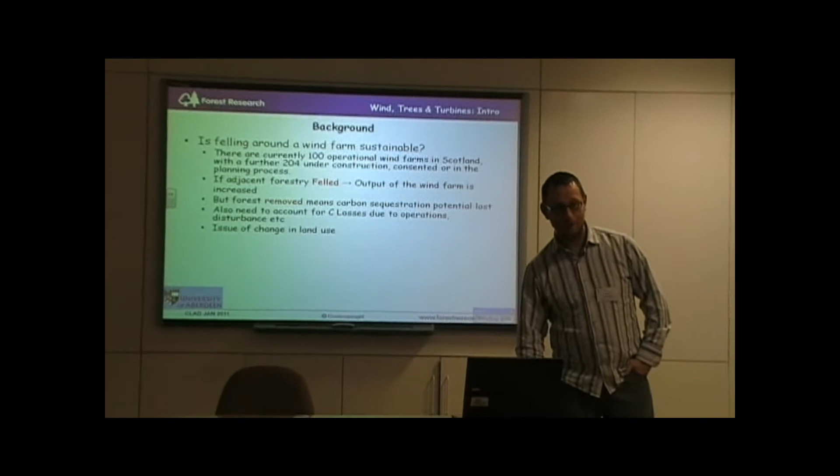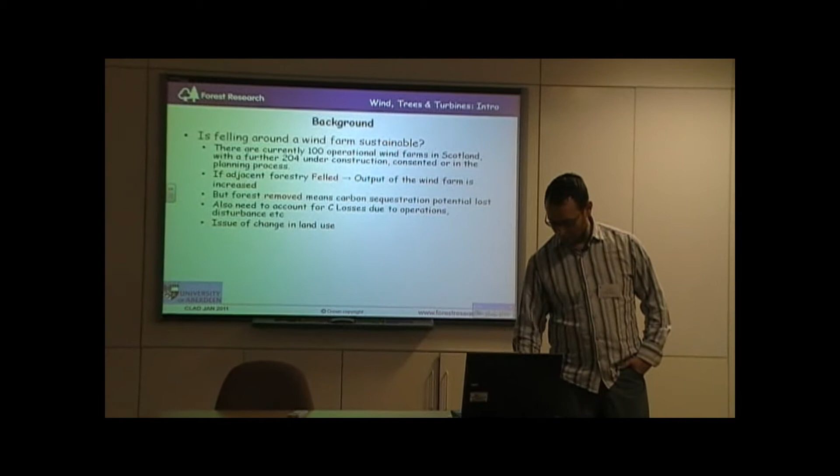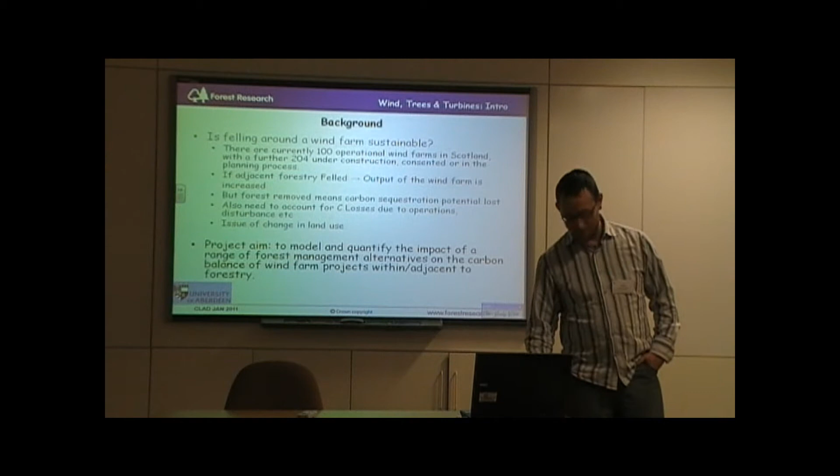I'm going to talk to you about the forest management bits. Barry will talk to you about the forest-tree-wind interaction bits. If we have time at the end, I'll say a little bit about the statutory planning and forest strategy impacts as well. So the project's aim is to model and quantify the impact of a range of forest management alternatives on the carbon balance of wind farm projects which were within and or adjacent to existing forestry.

Within the Climate Change Scotland Act, there are very strong incentives for the development of renewable energy technologies, one of which is wind. But there are also very strong assumptions regarding the net benefits to society of carbon capture by forests. Forests are very efficient solar panels, if you want. They convert solar energy into timber, and they're very good at it. So we have to take that as a fundamental understanding that the forest is actually providing a very useful service to society.

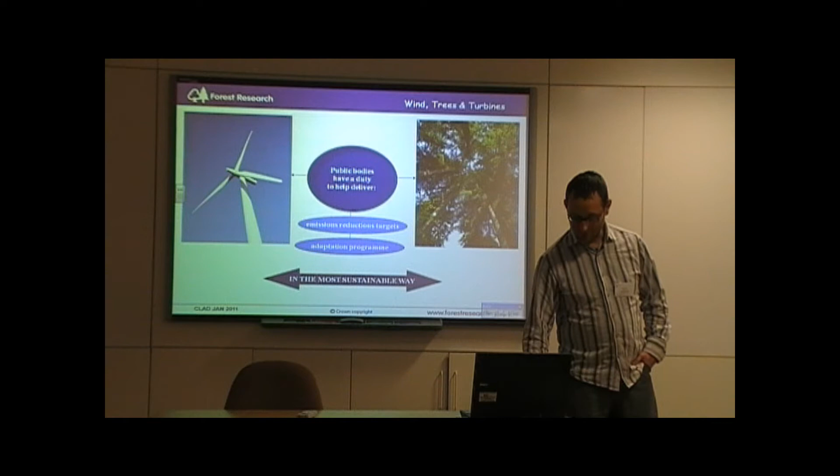And public bodies such as Forestry Commission, Scottish Government, have a duty to help deliver emissions reductions targets, maintain the land use capability, ability to adapt to future climate change, and do that in the most sustainable manner. That's why there's regulation, planning, etc.

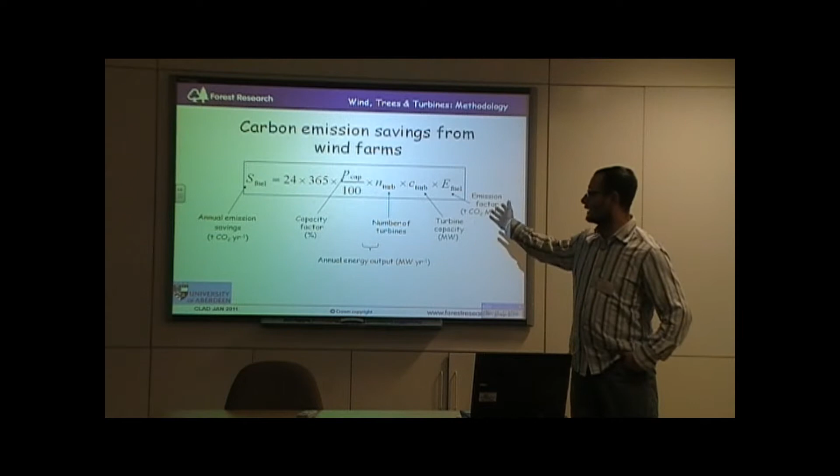Now, the original calculator that Joe put together, I'm sure most of you in the audience have seen this, looked at the annual emissions savings offset against carbon-intensive fuel sources for a site with a given capacity factor. It looked at all of the various processes that you have to account for in that LCA style analysis.

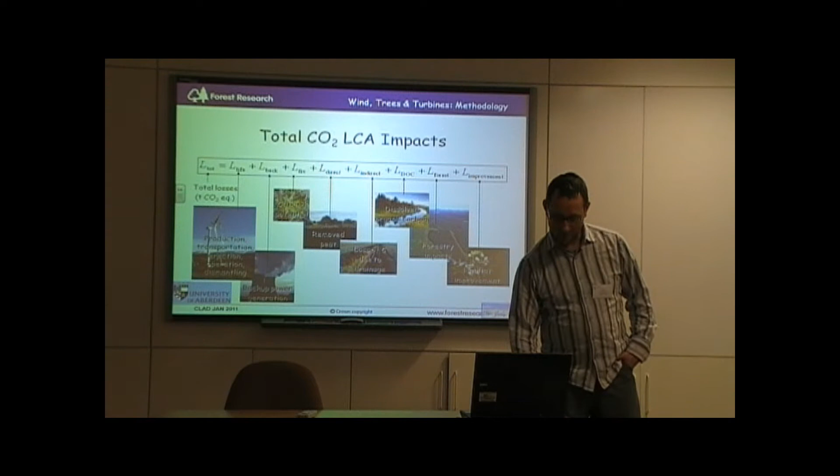In looking at the forestry impacts in the existing version, the version you can download off the Scottish Government website, forest carbon loss is calculated at a fixed rate that's integrated across the rotation life of a forest. The standing forest carbon is unaccounted for. Where does it go when you fell it? There's a loss of it to the atmosphere, but what you do with the actual timber product is not within the boundaries of the calculator as delivered.

There is no impact of that forest being adjacent to the turbines. It only does deep peats, and forestry - there is quite a lot of forestry on deep peats in Highland Scotland, in very windy places - but there's also a lot of forestry on organomineral soils, which are becoming an increasing focus of the developers' portfolio. There was no operational impacts and operational variation. By that I mean the ability to manage the forest.

So, in the new version, forest carbon loss varies with age. It is explicit. So if you fell a 25-year forest, you lose the CO2 in the timber in that 25-year-old forest. You have the opportunity to capture some net benefit for the development by burning it as a non-fossil fuel, as a low carbon energy source - wood fuel. You can use it as wood fuel.

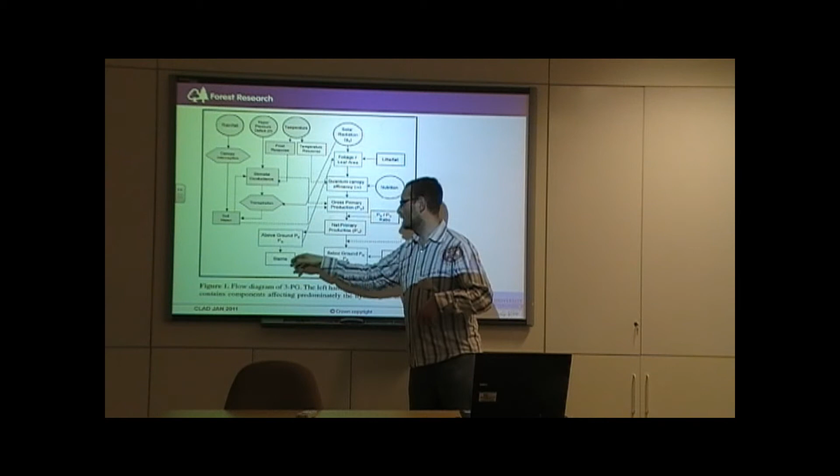So I'll touch on 3PG. 3PG is driven by climate, temperature, rainfall, etc. It then essentially assumes a tree is a huge leaf, and it partitions the carbon that's captured by that leaf into a growing tree, and some of that is put into stems, some of it into the ground, some of it turned over in roots, but it's a fairly simple process.

It's bread and butter for a physiologist.

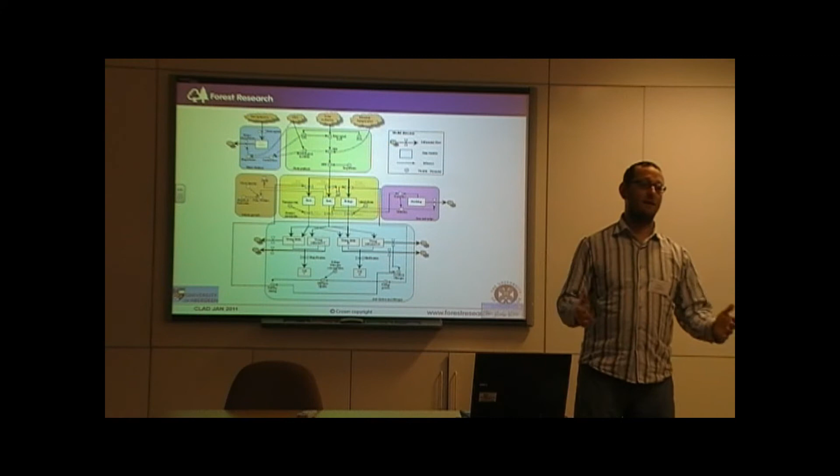This is the actual program that we use to run it, and you can see it's a little bit more involved, particularly in the soil component. My colleague Georgios Xenakis, who's at Edinburgh University, is responsible for this part of the project. What we're doing is using a complex physiological model which we then simplify down into the most essential elements to give you a reasonable estimate of the carbon exchange that the forest provides.

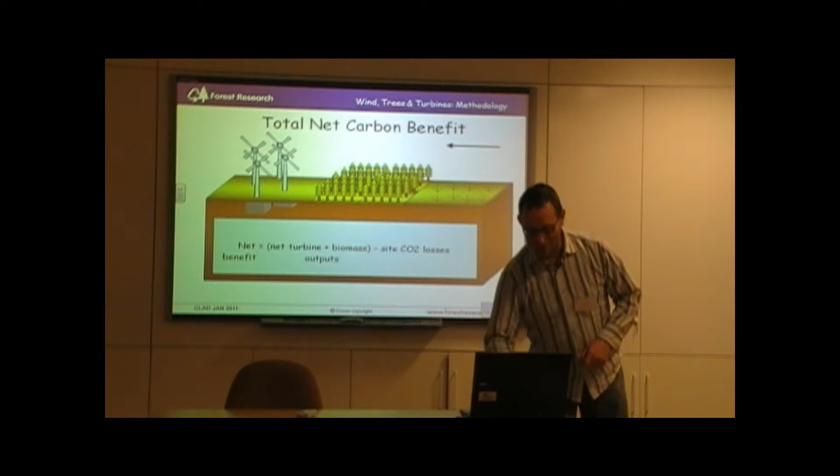Thanks to Joe for these diagrams. They're not all working. So what's the total net carbon benefit? Well, there's something gone a little bit strange here. It's a version control issue. I work for the civil service, we only have PowerPoint 2003.

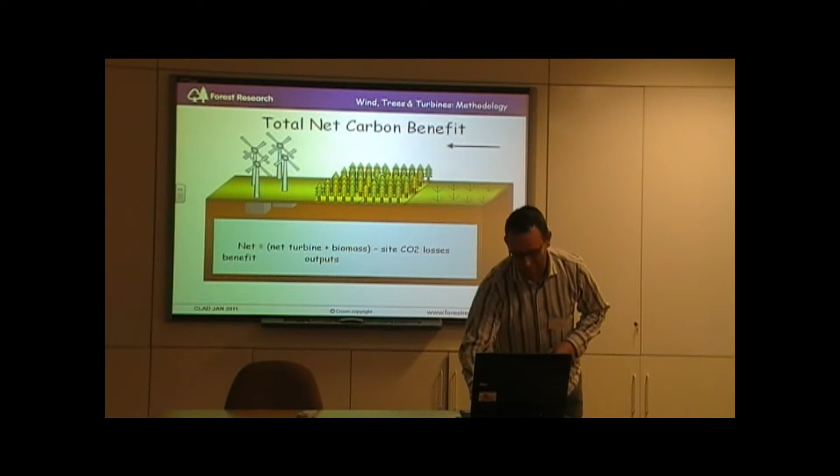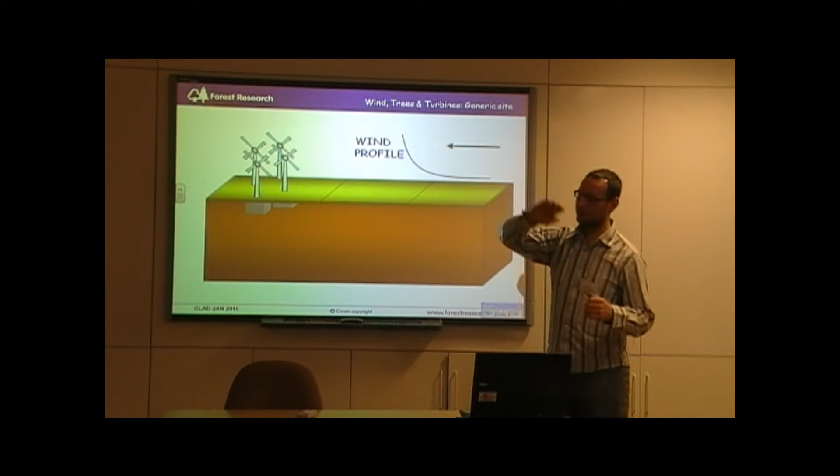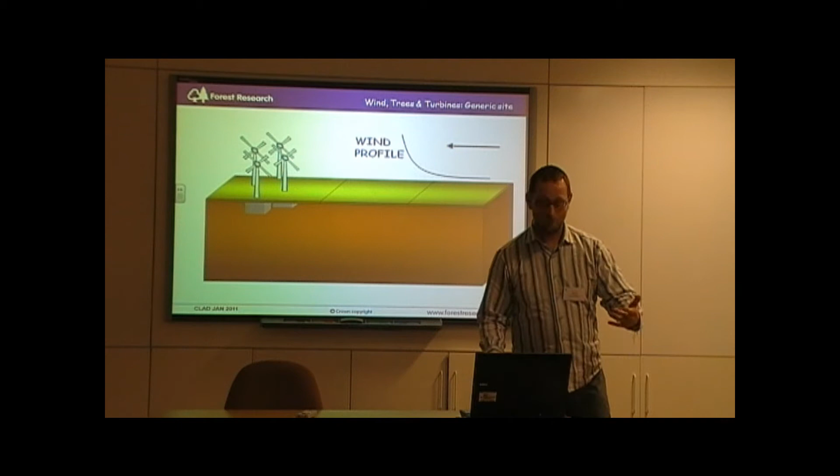Net benefit: net turbines, potential biomass, minus site CO2 losses. If we remove all the trees, we get a very predictable wind profile, and we maximise the potential net benefit from the turbines. When a forest is present, its physical presence alters the wind profile.

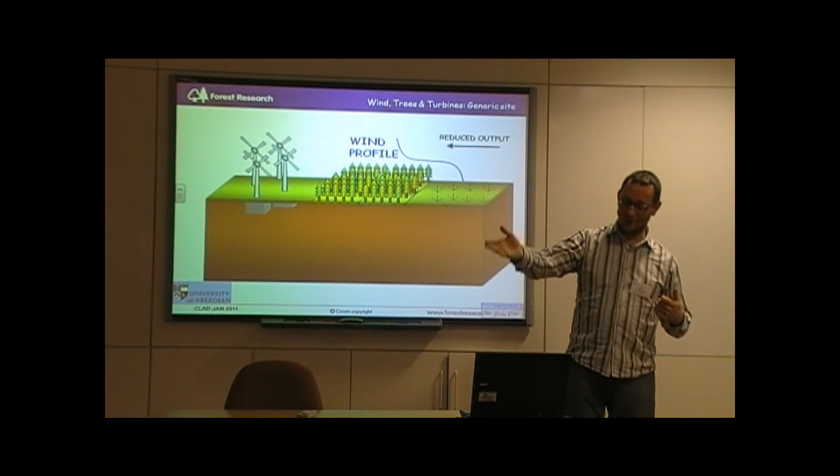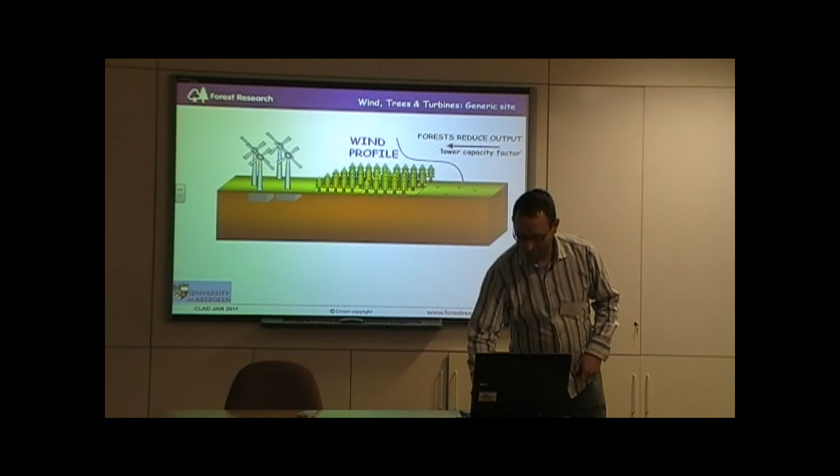This is the expertise of Barry, so I'm not really going to go there anymore. But the essential thing is it lowers the capacity factor. You're not going to get as much output from your turbines in the presence of forests. But we can manage those forests in a number of ways.

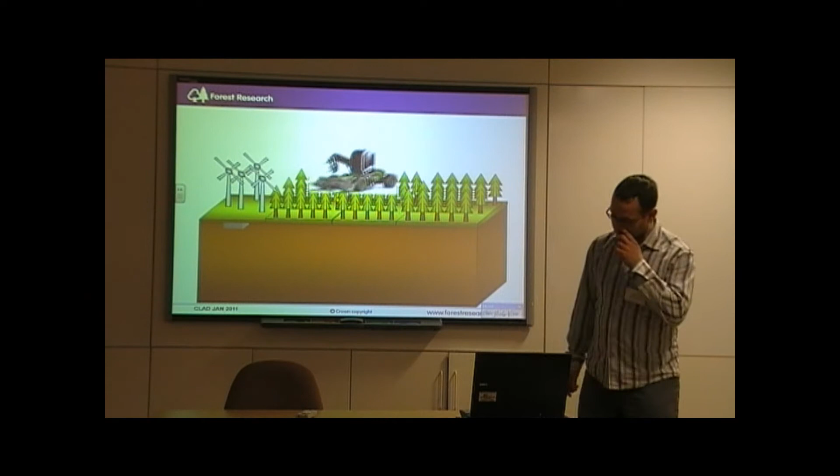We can take our harvester and create a keyhole. The tool allows you to set the keyhole dimensions as you see fit as part of your site management. It's not fixed at 75 metres, that's just an example.

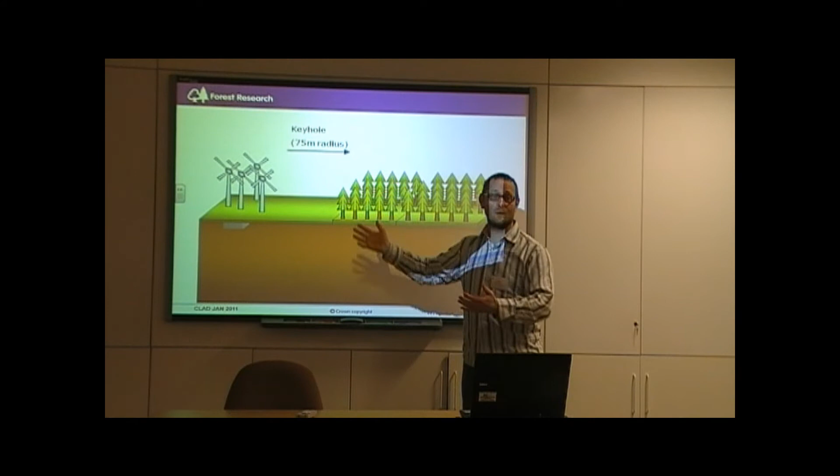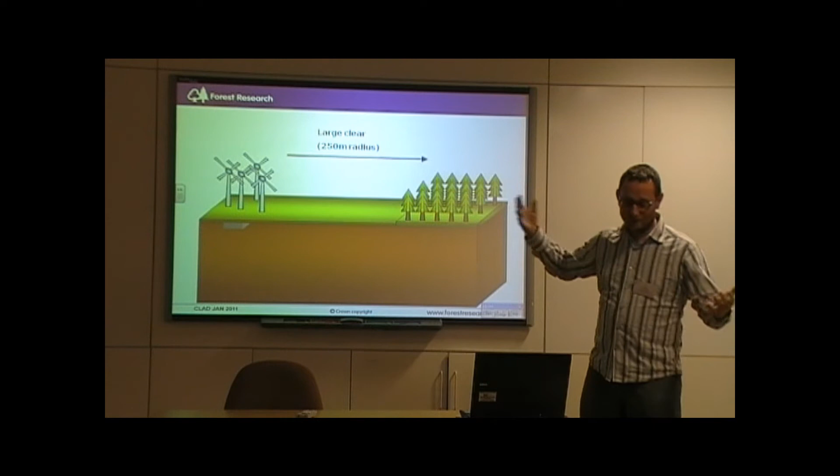You can take your harvester and fell a large clearing. In this instance, I'm suggesting 250 metres. You can say it's 800. I really don't mind.

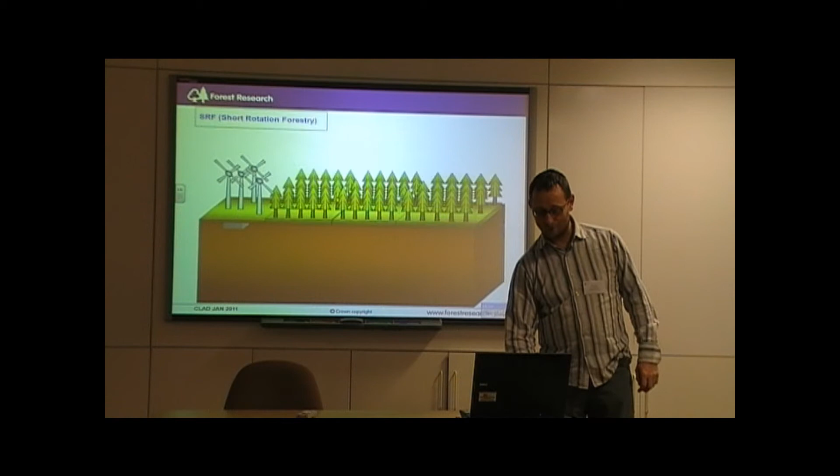Or you can fell the whole lot. In this instance, it's an 800 metre radius to the existing forest edge. But whilst you do that, you also have an option of then replanting a portion of the site with what I'm terming short rotation forestry.

There's a number of means of managing forests to low vegetation height. Coppice is one of them, and would be included under the generic forestry banner that I'm using today. Low height native woodland would be another one.

We are not going to deliver you a tool that gives you all the different forest management options. It's going to give you an option of replanting with one of two species, but then managing their height. That's what it's going to do. If you want to do low density native woodland, you'll have to think up a clever way of doing that yourself, or come and speak to me privately and I'll agree a price.

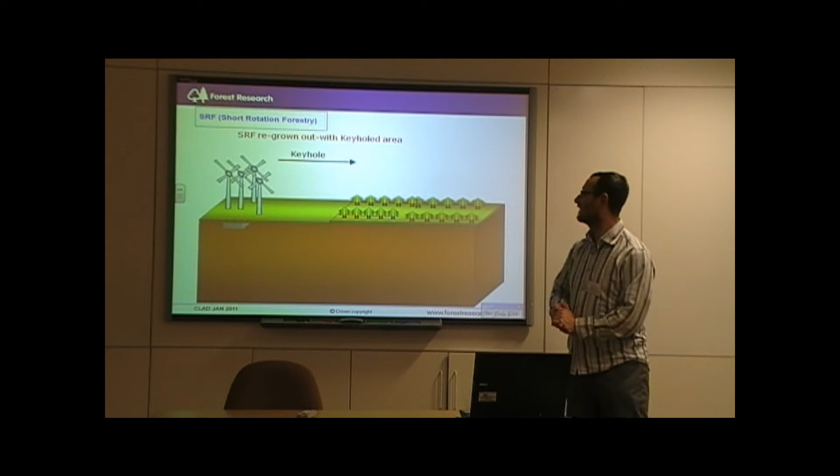But what we can do is look at what happens with short rotation forestry, and how that short rotation forestry can be planted outwith a keyhole or within the large clearing—all these options are there in the tool. So it allows you to look at the different forest management options and then your total carbon emissions and carbon payback time.

At which point I'll let Barry tell you about wind.

Okay, as Mike said, the presence of forests affects the wind profile. Is it that one too? No, that one that's on the table. Yeah, has this got a laser? No. Yeah, we couldn't get it to work earlier. It wasn't working earlier. Okay.

The presence of forest affects the wind profile, and as we know from some wind farms that have been developed in Scotland, if you're not careful, the return from your wind farm can be quite severely impacted by the presence of those trees.

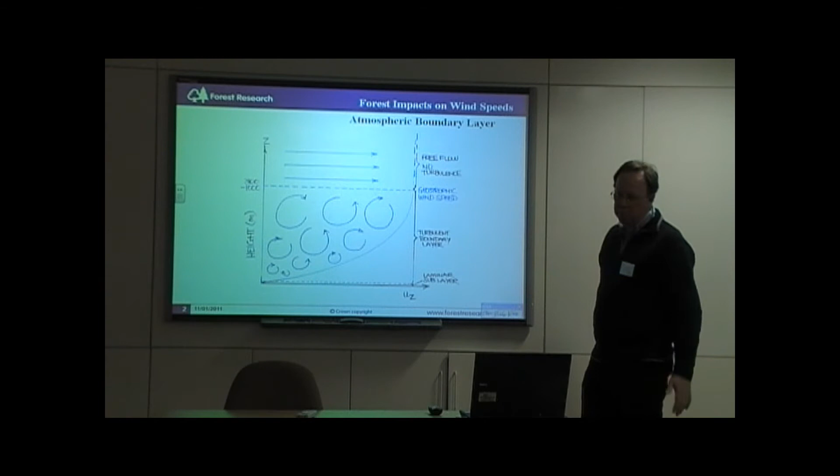Just a little bit of basic science about the atmosphere. The area closest to the surface of the Earth is called the turbulent boundary layer. It's quite turbulent, well mixed, up to somewhere between 300 and 1,000 metres. That's why when you take off in an aircraft on a nice sunny day, it tends to be a little bit bouncy until you get up to a certain height. And you've got this logarithmic wind profile from the ground upwards, so quite a quick increase in wind speed as you go up with height. But the shape of that profile depends on...

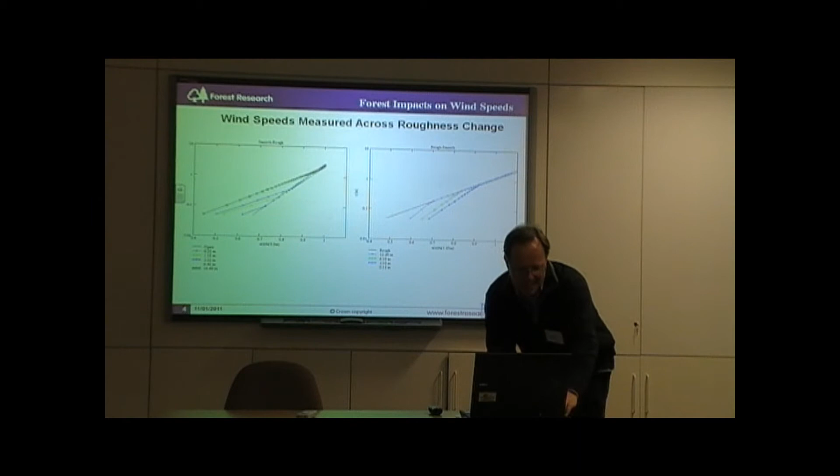Sorry, I think there's a slide. There's a slide that's hidden there. Let me just check. I think that one's hidden. How do you unhide?

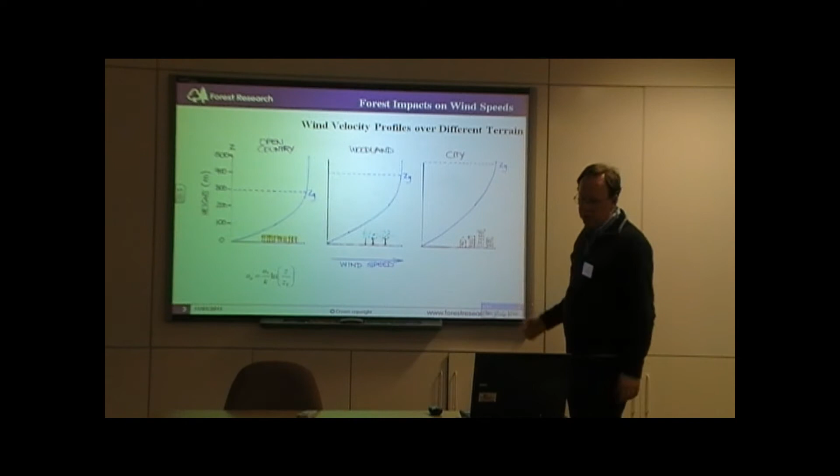Over open country, you get to what's called a geostrophic wind speed - that's really the wind speed without constraint of the ground fairly quickly. Over forests, that's much slower. So at the same height above the ground, over a forest you'll have a lower wind speed than you will over open country. And it's even more dramatic somewhere like a city, which is extremely aerodynamically rough.

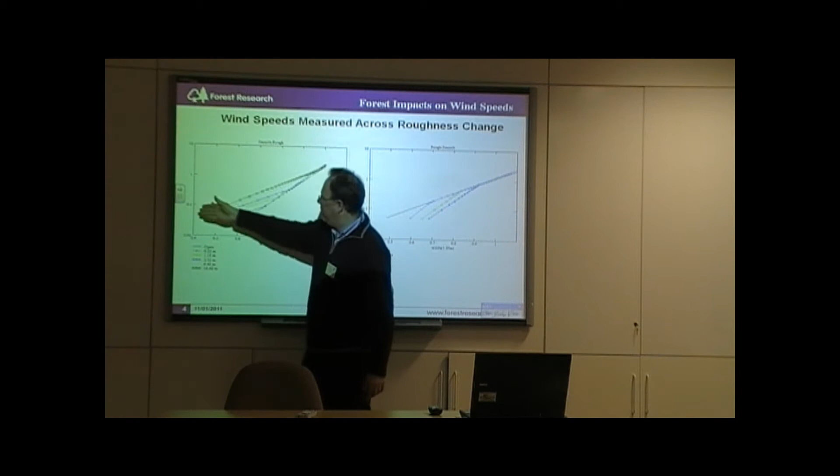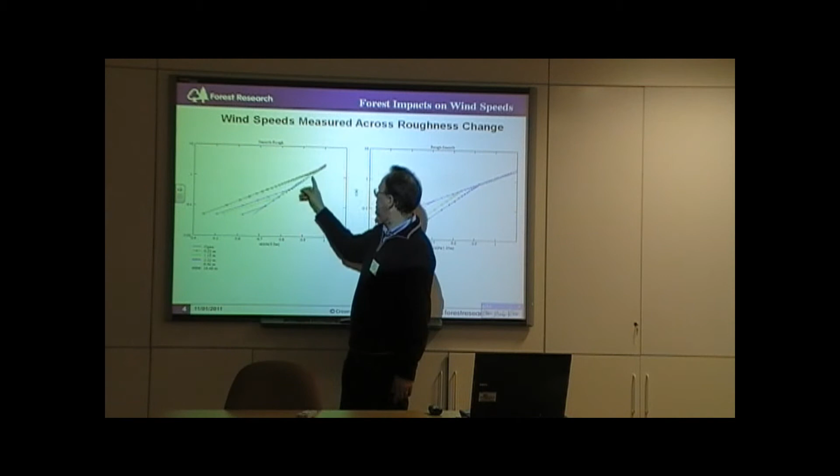People have done measurements on this, and this is a log plot here, so our logarithmic profile looks like a straight line over open ground. When you go from a smooth to a rough transition, as you move over that, the wind profile changes. The wind speed is now going down closest to the ground, but at some height above the surface, you're back to the wind speed you had upwind.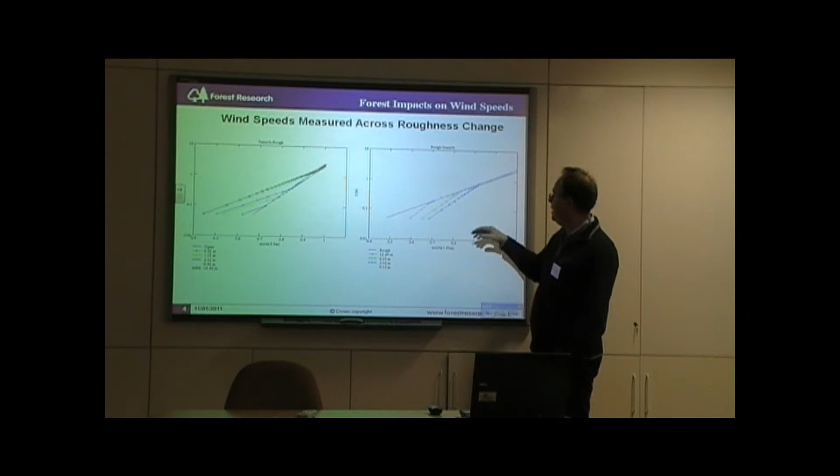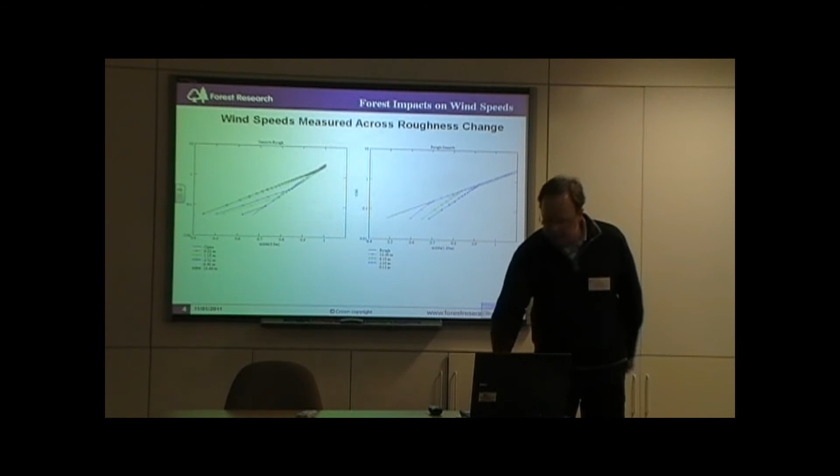The same happens when you go from rough, like a forest, to smooth, like grassland. This profile, the red one here, starts to restore back - the wind speed starts to recover. But notice it recovers from the ground upwards. This is all well known, it's been known for many years - going back to German pioneers Prandtl and von Karman.

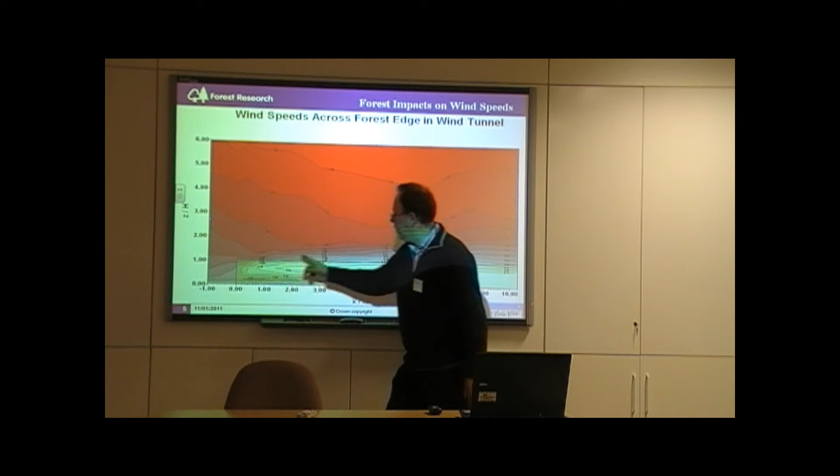This is showing what happens over a forest, wind coming from the left. Here's the forest, this is in a wind tunnel. What you see is that inside the forest, there's a massive reduction in wind speed. But over the top of the forest, at this point, the wind speed here is 0.4 compared to what it was upwind. So the forest has a dramatic effect - it decelerates the wind speed quite dramatically.

This is some work by Rodrigo et al, with a quite sophisticated computer model. Here you are in a gap - this is what the wind speed would be like upwind. And then inside the gap you can see that you've got very much a reduction in the wind speed.

But the opposite of that is you get a huge increase in the turbulence intensity. This is bad news for a wind farm developer, because they've now got high turbulence levels at the base of the generator, and that could cause it to be damaged or cease to work.

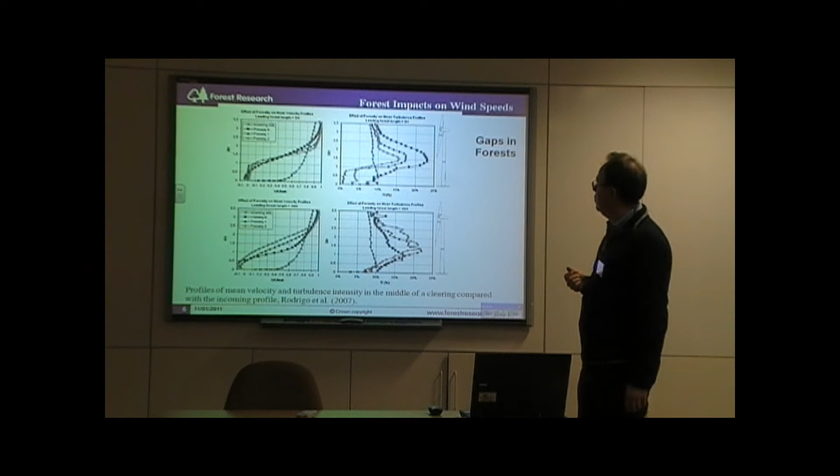So what we did - and I don't want you to worry about the equations, but all I want you to know is they're relatively simple. They can be found in the standard literature, and you can code it up in a spreadsheet - that's why I use this tool. You don't need a complicated numerical model. You can just use what I call a roughness model to calculate how the wind profile changes going from one type of land cover to another.

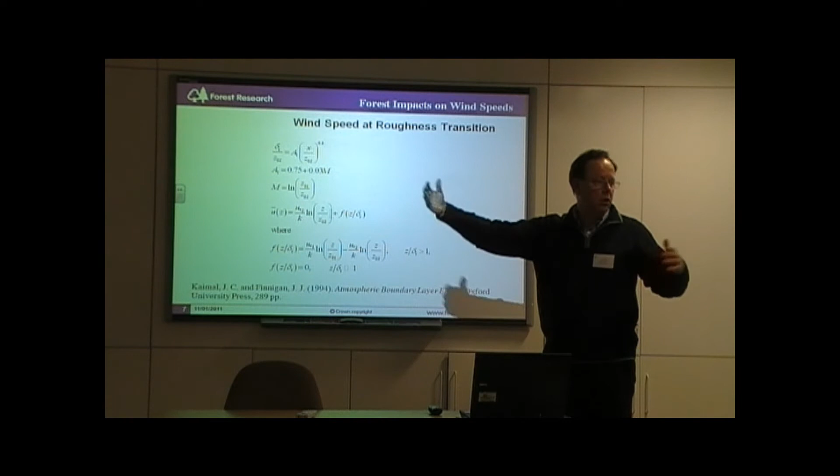So you can take your logarithmic profile over open ground, over the open moorland, adjust it as it goes across the forest, adjust it again as it goes over a gap in the forest, and then adjust it again as it goes over another bit of forest. You can do that on and on, ad infinitum, and it's very quick. You can go to that book and do it yourself if you wish - I've done it for you.

This is at Harwood Forest in the north of England. We had measurements quite close to the ground, up to about 15 metres, where we had a tower upwind of the forest and at different edges back from the forest. The red here is a modelled profile, and the squares are what we measured. Then just under 4 tree heights into the forest, this is what I predicted with the model, and here's the measurements. Then 14.5 tree heights into the forest, here it is in green - that's the modelled profile.

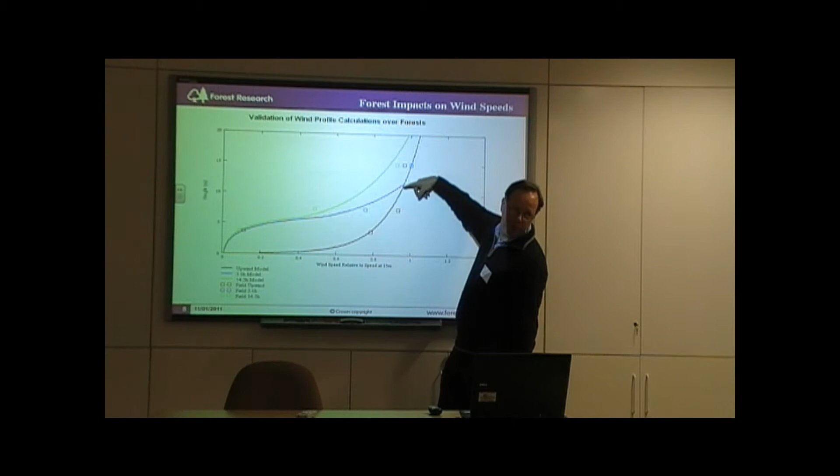You can see exactly what I said: at the bottom, the wind speed starts to decrease very dramatically, but at some point it's the same as it was upwind, and as you go further and further into the forest, that height goes higher and higher.

This is the site - Harwood Forest. If people know that part of the world, it's near Otterburn, and we worked with the company called AMEC at that time.

They had a 70-metre tower here in a clearing in the forest, and they put one out here. This isn't actually forest anymore, but they measured wind speeds there, and we were able to look at how the wind speed changed between this point and this point because of the presence of the forest.

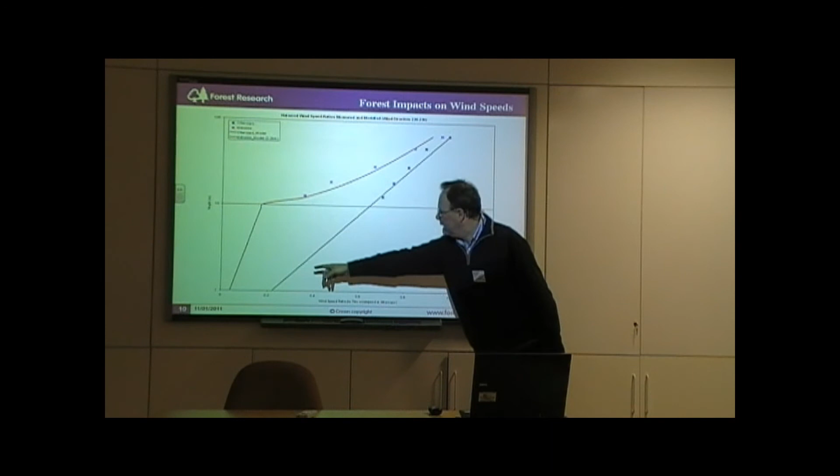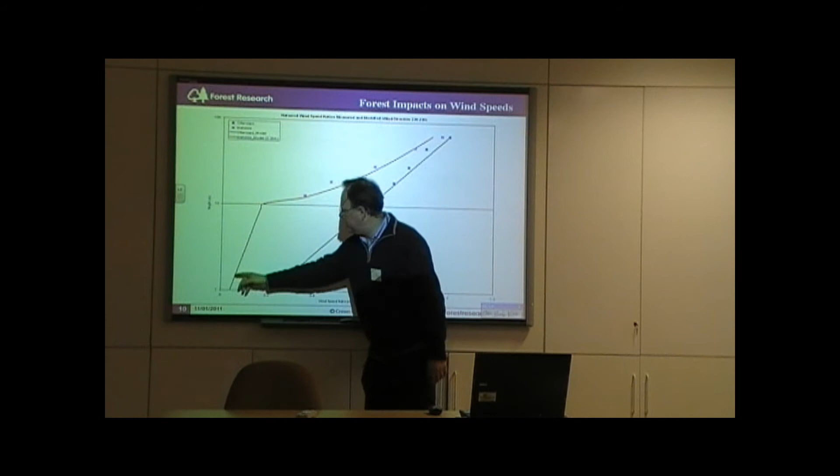This is a logarithmic profile, so the log profile becomes straight. This is what I predicted for the model upwind, and here's the measurements from the AMEC 70-metre tower. This is what I predicted inside the forest with the model, the red, and the purple is what the cup anemometers on the tower said.

So it gave me reassurance that the model has done a good job of getting the wind speed profile correct. It doesn't do anything about turbulence. It's a very simple model, just looking at mean flow. It can't tell you anything about turbulence intensity.

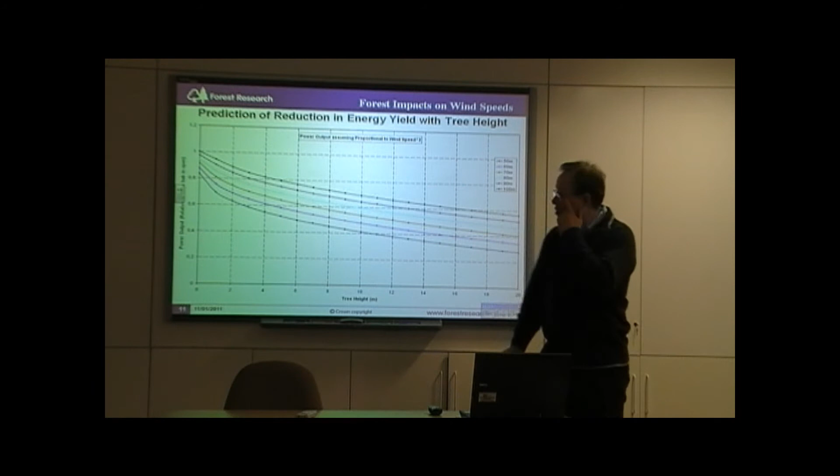This is just to show you the impact of forest on the energy yield, assuming that the power output from the turbine is proportional to the wind speed cubed. Here we have tree height increasing, and I've compared the wind speed at different heights above the ground relative to a hub height of 100 metres. So with no trees, at hub height, obviously, the ratio is 1.

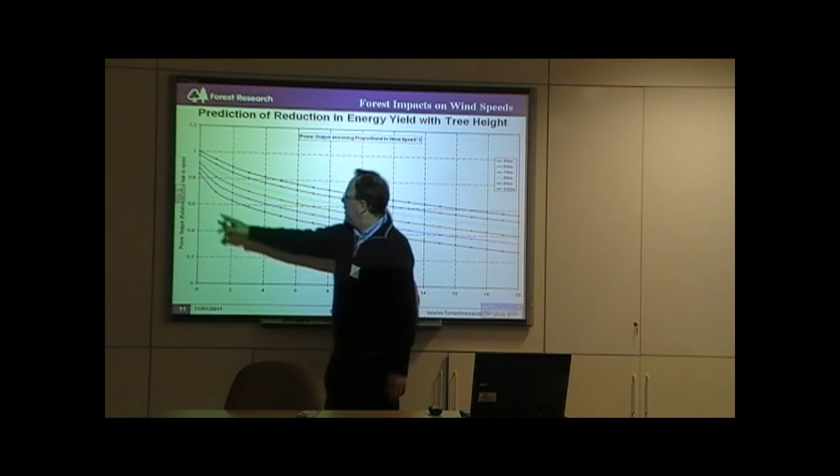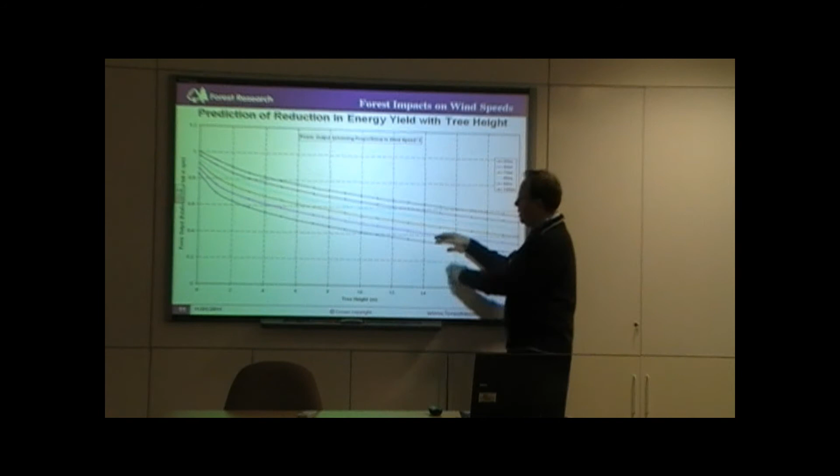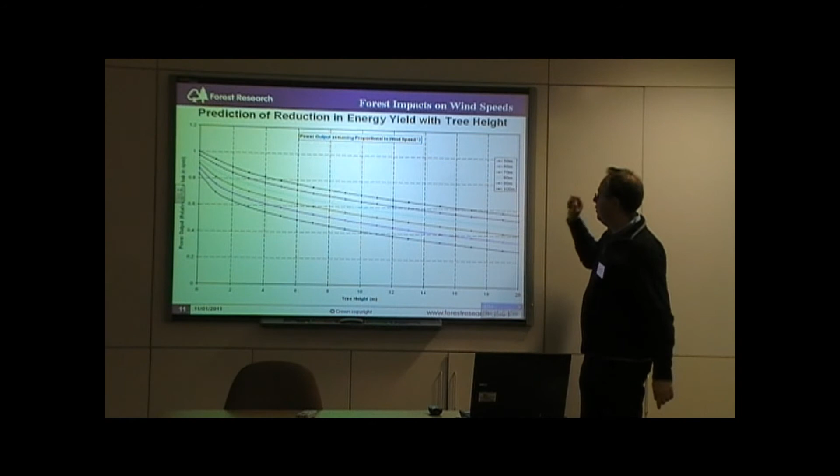And so this isn't wind speed, but power output. If you've got a turbine with a hub height of 100 metres over a 20-metre forest, you're going to produce less than 60% of the power that you would have got if you didn't have the forest. So you better take it into account if you want to calculate your payback periods and get the bank to invest in you.

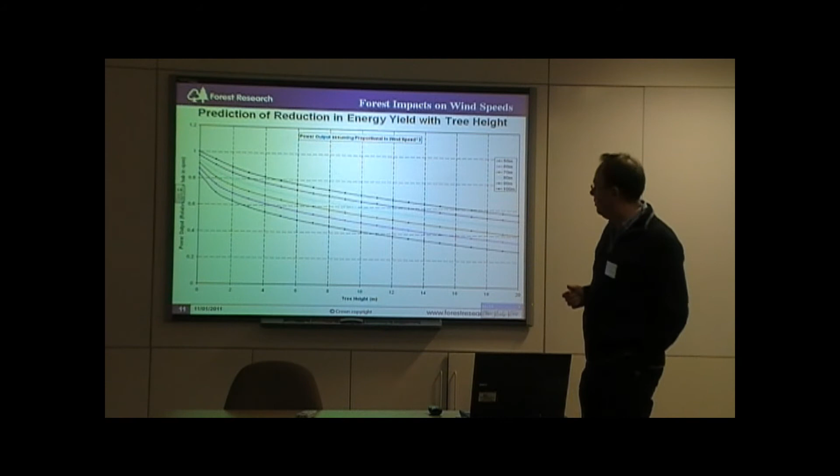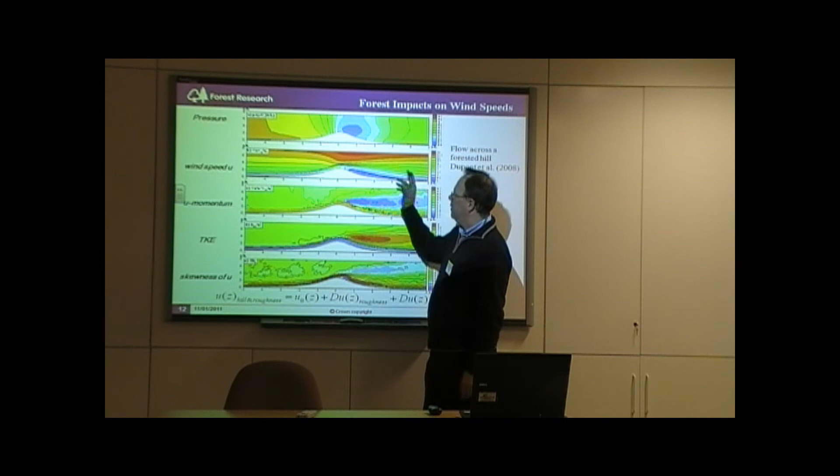So you can see at the back of the hill you've got a very quiet area, and at the top of the hill you've got a very sharp gradient in wind speed. This took 24 hours to run on a very sophisticated computer. It's not the kind of thing we can build into the spreadsheet.

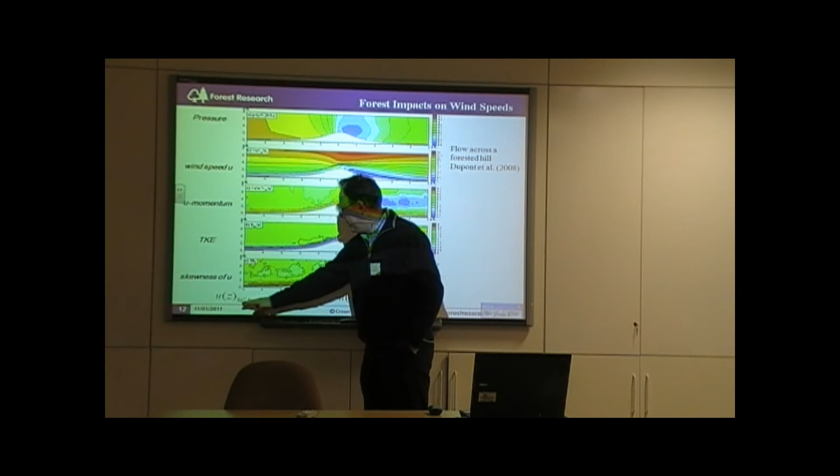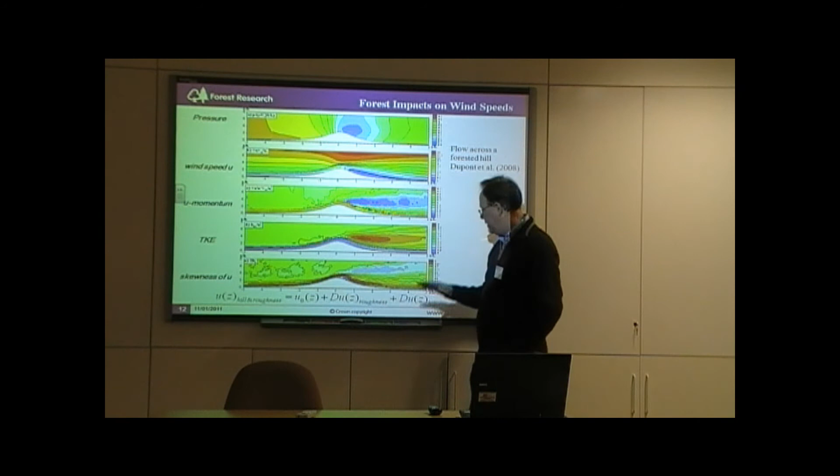But it's possible to separate the effects of the forest, the roughness of the surface, from the effects of the terrain. So what you can do is take our simple roughness model and combine it with the outputs from a simple airflow model like WAsP, and add those effects together. So that the wind speed, as an effect of hill and roughness, is the wind speed upwind plus, and this can be a negative or positive number, the perturbation due to the roughness plus the perturbation due to the hill. You can separate those effects.

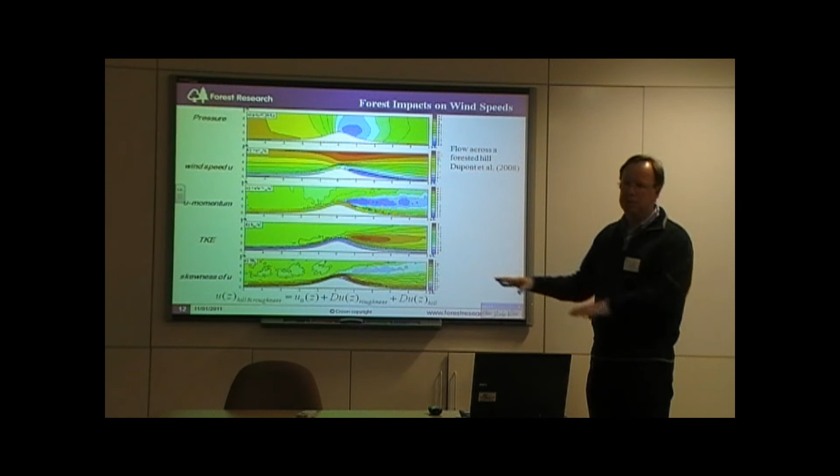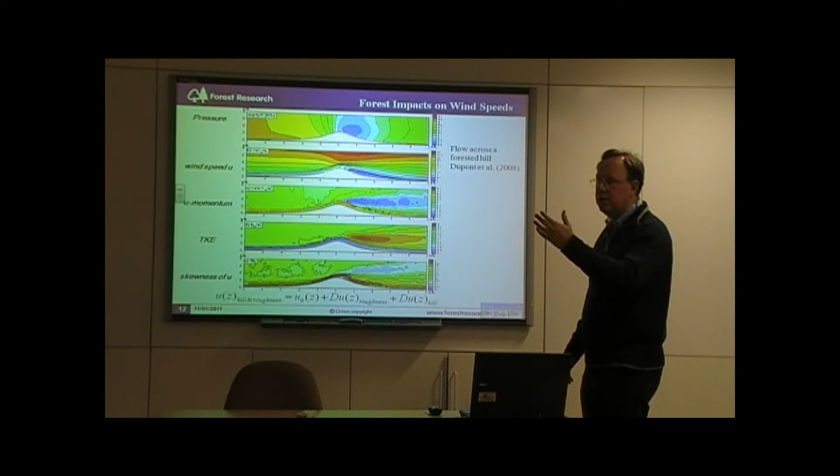I'm working with a colleague in Sweden who has been using the WAsP airflow model and using this roughness model, putting them together in a GIS, so that you can first calculate the effect of the terrain with no trees on it, calculate the effect of the trees independently, and add them together. She's putting it all into GIS to calculate the risk of wind damage, but equally easily you could use it to look at the effect on the wind farm.

Okay, quickly summarising, because I'm sure everybody's very hungry: wind speed is reduced and turbulence intensity increased over forests. And wind speed increases and turbulence decreases in gaps or behind the forest.

Stating the obvious, it's possible to model the wind speed changes across forests and gaps relatively easily, and we have that in the tool. Turbulence intensity would require more sophisticated numerical models. I've got some ideas how to do it more simply, but I haven't fully tested those at the moment, because I know that worries the industry a lot, and I'd like to include it, but I'm not promising anything.

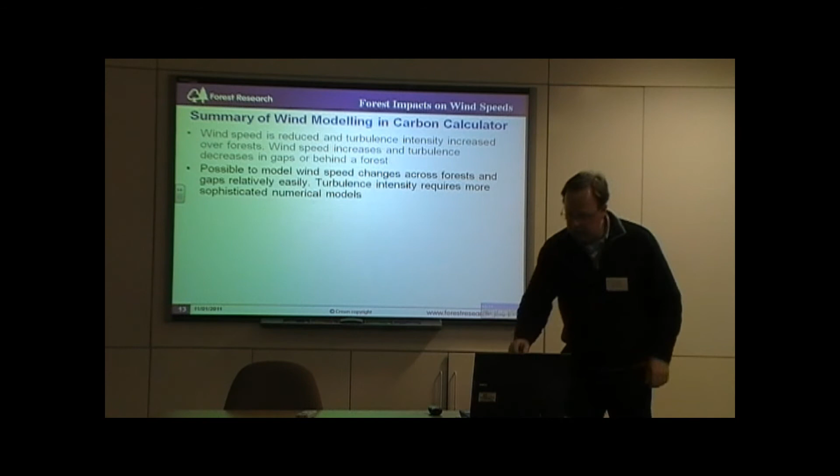And current wind modelling does not account for topographic effects. So the tool we have here is just the effect of the forest. It's not putting the forest together with topographic effects.

Potentially you could quite easily do something to say if your turbine was on the front of the hill, on the top of the hill, or on the back of the hill, but we haven't promised to do that.

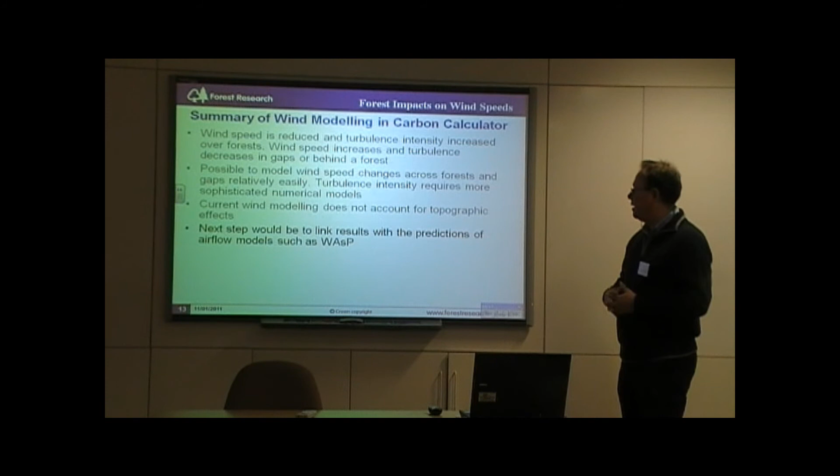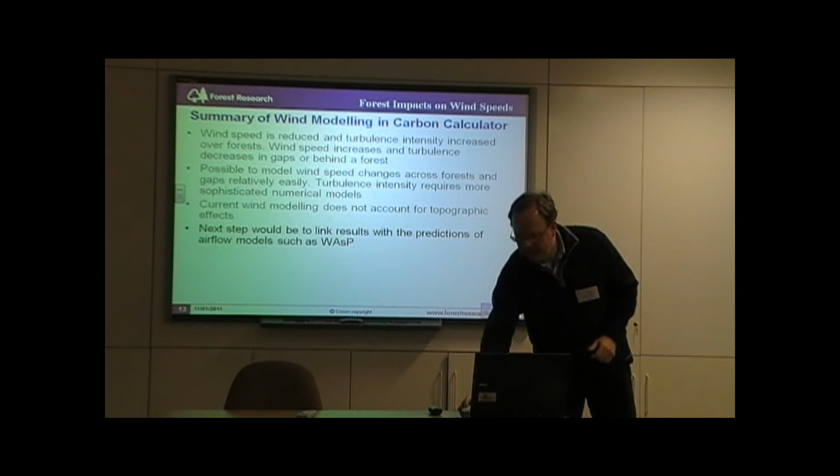The next step would be to link these results with the predictions of airflow models such as WAsP, which I mentioned. That's something I'm doing independently and separate from this project, but if I could somehow pull it in, I would do. Further testing is required against completed and planned wind farms.

What would be wonderful is to get real data from wind farm developers where they've measured the kind of outputs they've got from their turbines after they put them up, and they've got wind speed data and power output data, because in the end the integrity of the tool will depend on how well it matches up against what people have experienced.

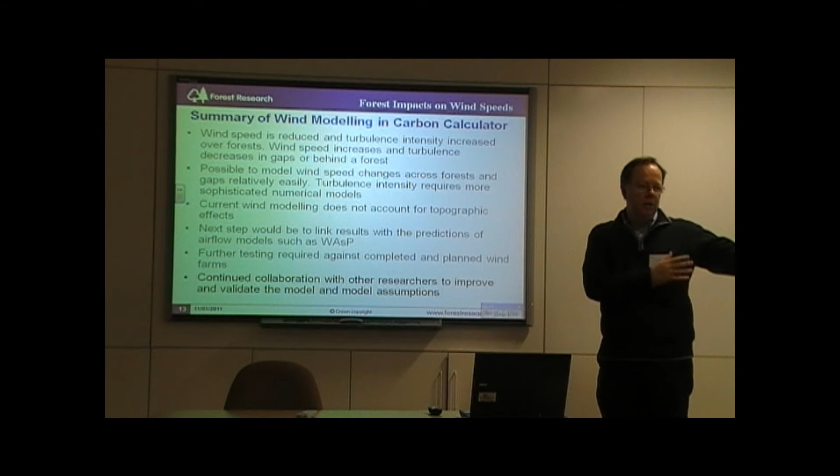We need to continue, and I'm doing that. I mentioned Kristina Blennow in Sweden and colleagues in France. We need to continue collaboration with other researchers to improve and validate the model and model assumptions. As Joe said before, no model is ever finished. I know researchers are often accused of saying, oh, we need to do more research, but the truth is this is the best we can do at the moment. Next year we'll be able to do better because of new information - somebody will have done a key experiment somewhere that provides us a new set of data.

Thank you very much.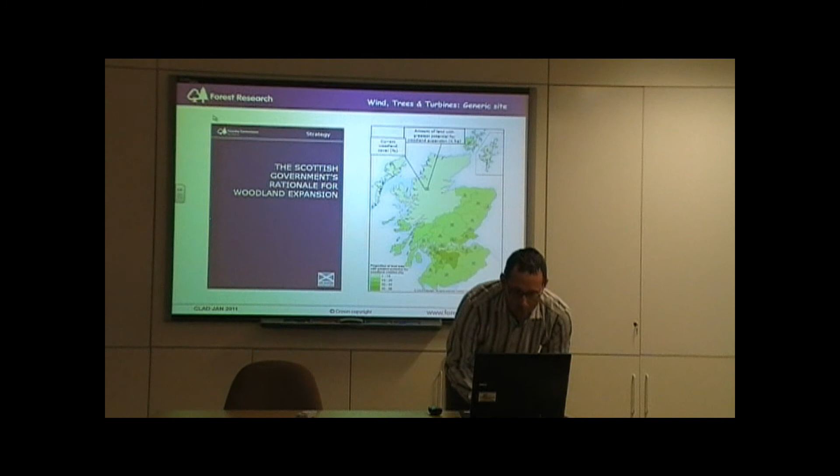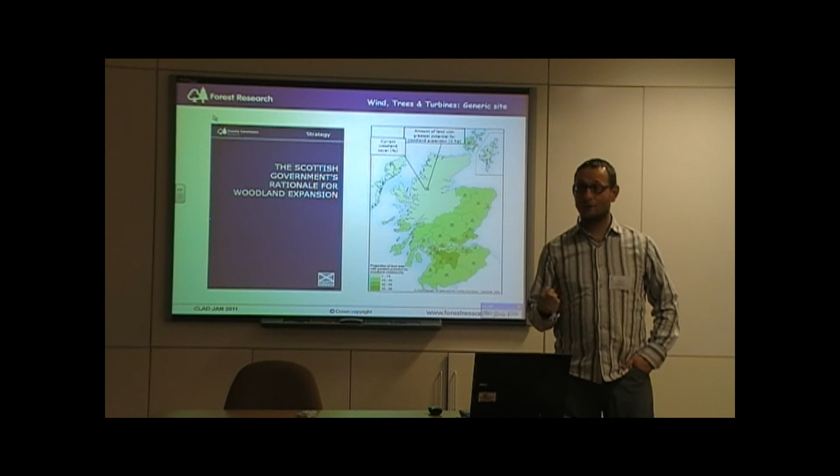Within the planning process in Scotland, there's the drive for the development of renewable energy technologies, but there's also the drive for woodland expansion for a number of reasons, one of which is the carbon sequestration potential that forestry provides to society.

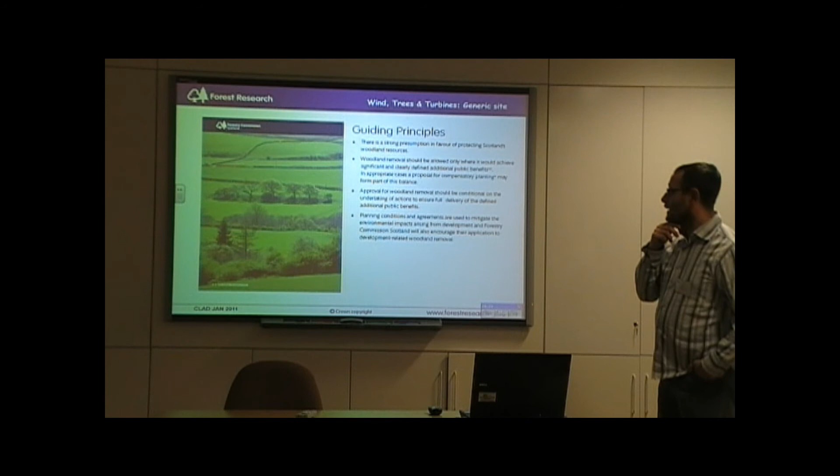The guiding principles embedded in that guidance, and also now embedded in the National Planning Framework, call for a strong presumption in favour of protecting woodland resources. Woodland removal should be allowed only where it achieves and demonstrates significant and clearly defined additional public benefits. In appropriate cases, proposals for compensatory planting may form part of this balance or negotiation. So that's now in the National Planning Framework.

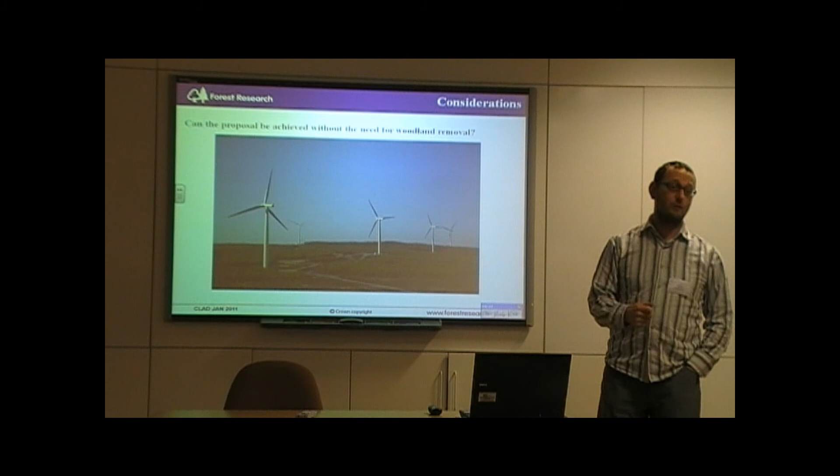What does that mean? Well, the first question is, can your proposal be achieved without the need for woodland removal? That doesn't mean that you can't manage the woodlands - it means that you can't permanently, for the lifetime of your development, remove trees from the site. Can you do that? That's the first question.

You might be adjacent, you might be within. Does the proposal have sufficient additional public benefit? Does the woodland require mitigation? How will the land use change?

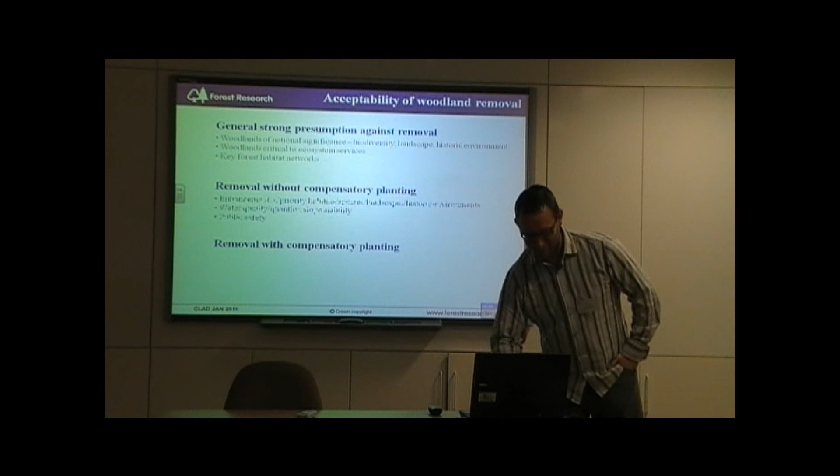Removal without compensatory planting is possible if there's an enhancement of priority habitats within the forestry matrix, if specific species are going to benefit from increased open land, or again for landscape and historic environment reasons, slope stability, and public safety.

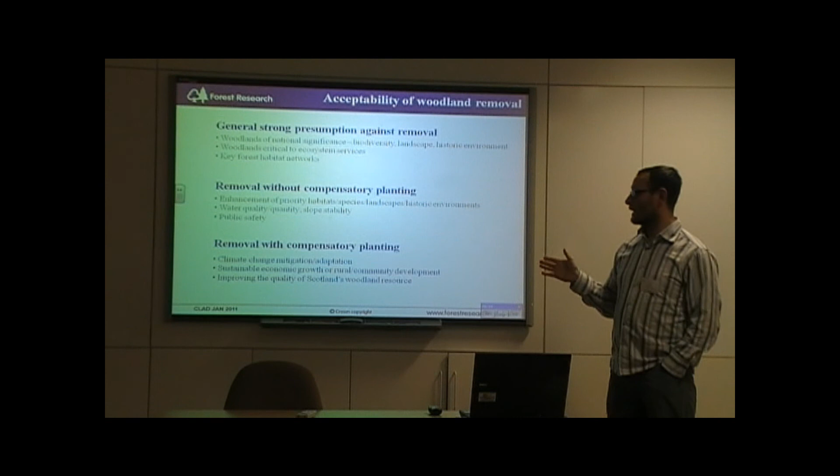Removal with compensatory planting is likely to be championed for developments within or adjacent to forestry, under a requirement for maximising climate change mitigation benefits, sustainable economic growth, and improving the quality and extent of Scotland's woodland resource.

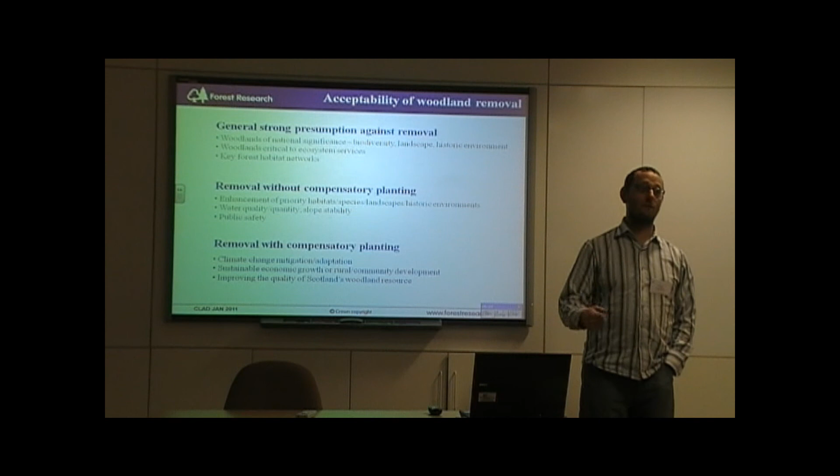Now that this legislation is embedded in the National Planning Framework, there is additional consideration to be had when you're thinking about how to manage woodlands adjacent to any land-based turbine development. That's all I've got to say.